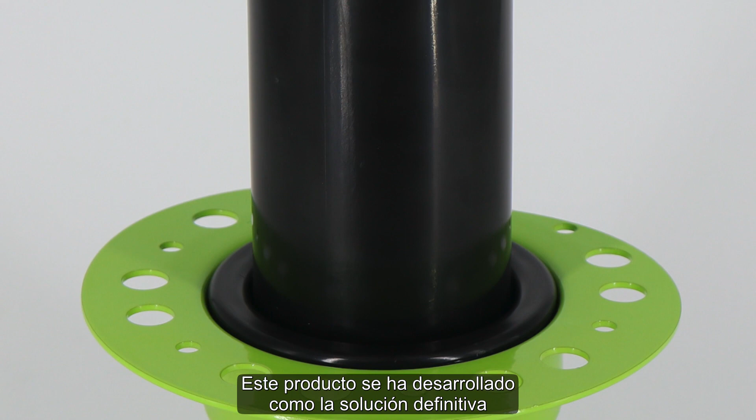This product has been developed as the ultimate solution to quickly and easily install freestanding bathtubs. It comes with an EZ-Click drain for tubs with integral overflow. The asymmetrical metal deck flange provides easier installation in tight spaces, while the removable drain stopper allows for easier cleaning.

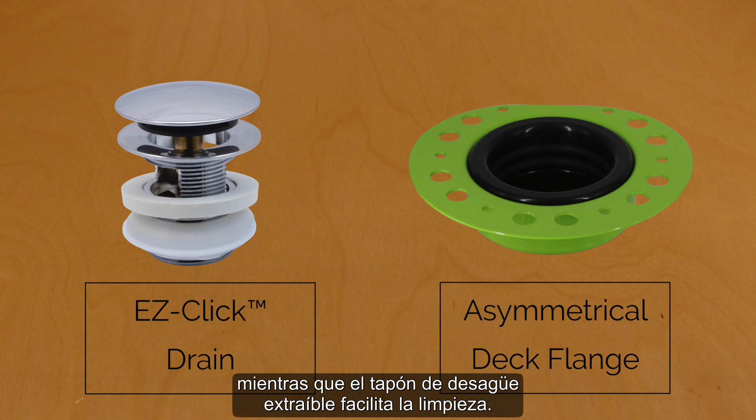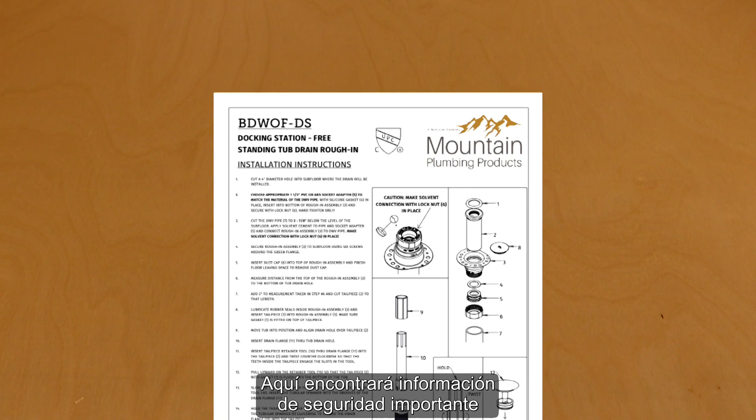Before you begin, please read and familiarize yourself with the installation instructions that came with your product. In here, you will find important safety information and additional guidelines for installing your new tub docking station bathtub drain.

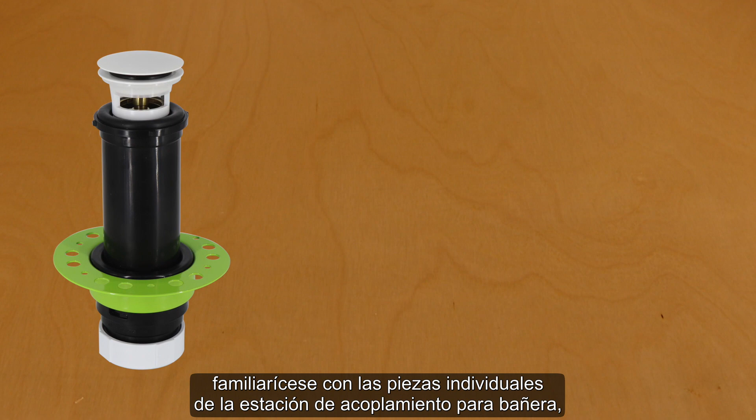Additionally, please also familiarize yourself with the individual pieces of the tub docking station model number BDWOF-DS as follows: tailpiece gasket, tailpiece, rough-in assembly, silicone gasket, socket adapter, lock nut, DWV pipe (not actually included), dust cap, spanner tool, tailpiece retainer tool, drain flange, cap and clicker assembly.

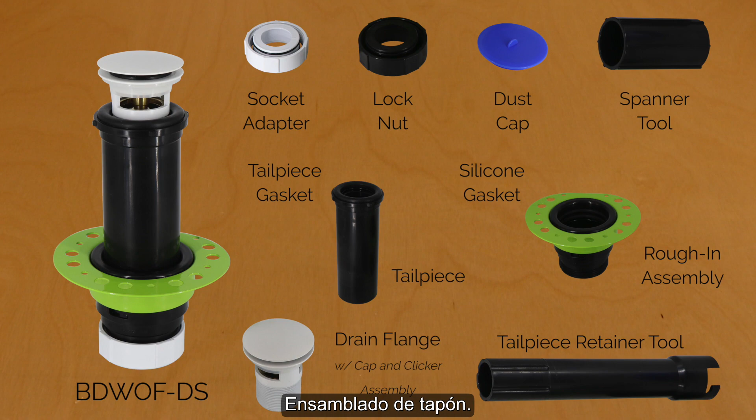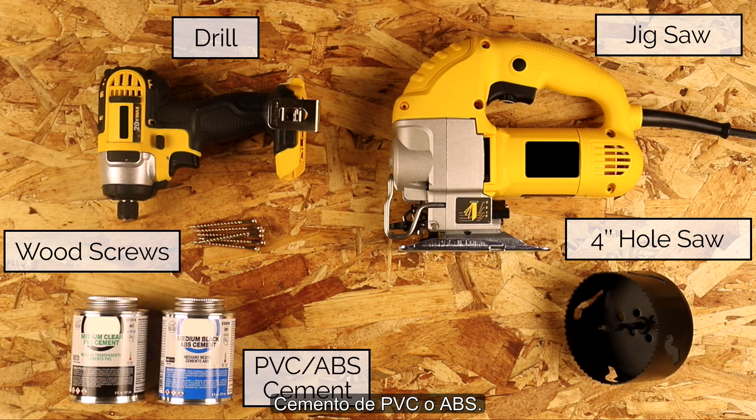For installation in a wood subfloor, the following tools are required: jigsaw or 4-inch hole saw, drill, wood screws, PVC or ABS cement, silicone sealant.

You are now ready to begin the installation of your freestanding bathtub utilizing the Mountain Plumbing Tub Docking Station. Using a jigsaw or hole saw, cut a 4-inch hole in the subfloor where the drain connection for the freestanding tub will be located.

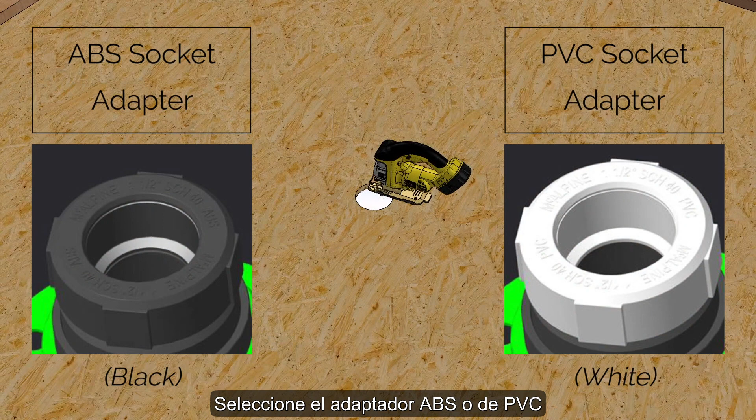Select either the ABS or PVC socket adapter, depending on the material of the drain pipe under the floor. On the underside of the rough-in assembly, insert the silicone gasket, the socket adapter, and the lock nut. Hand tighten only. Cut the drain pipe to be 2 7/8 inches below the top of the subfloor.

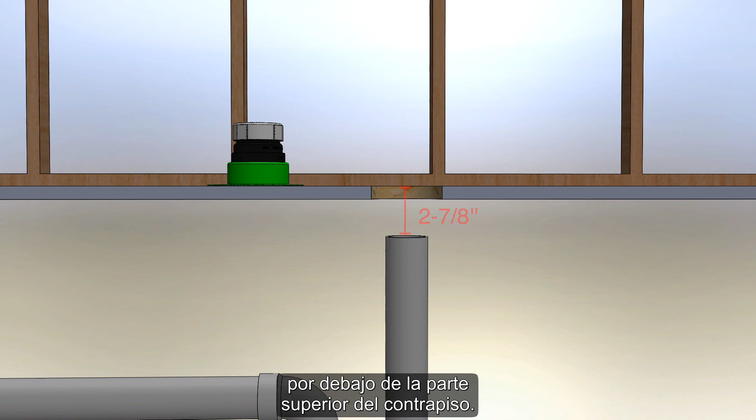Test fit the rough-in assembly to make sure the pipe fits snugly into the socket adapter when the green flange is resting flush on top of the subfloor.

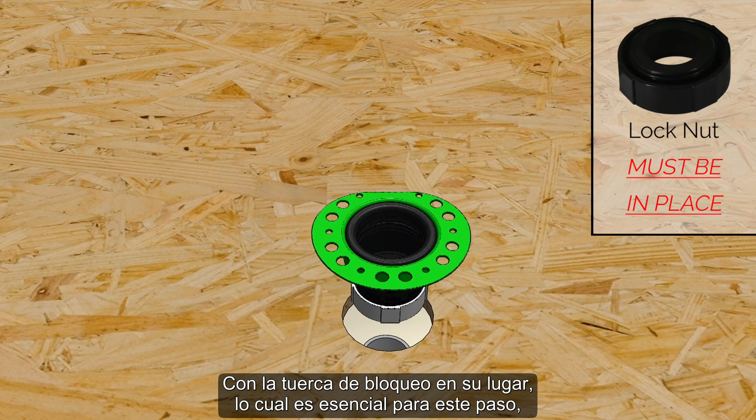Apply the appropriate solvent cement to the outside of the pipe and the inside of the socket adapter. With the lock nut in place, which is essential for this step, connect the rough-in assembly to the drain pipe.

Secure the rough-in assembly to the subfloor using wood screws through the small holes in the green flange. Insert the blue dust cap into the opening of the rough-in assembly. Continue to finish the floor, making sure to leave space to remove the dust cap.

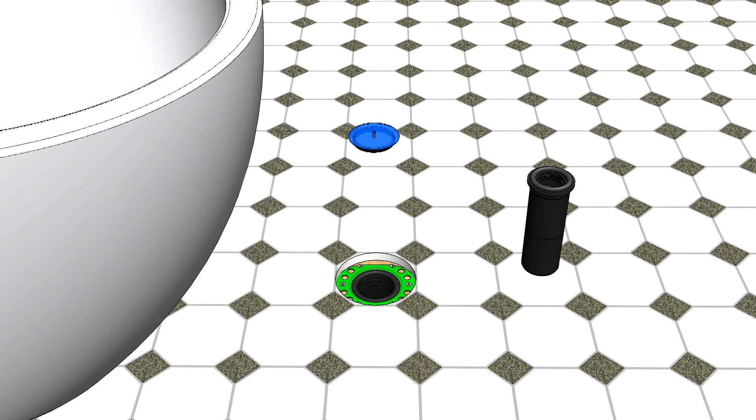Measure the distance from the opening of the rough-in assembly to the bottom of the tub drain hole. Add 2 inches to the measurement just taken and cut the tailpiece to that length.

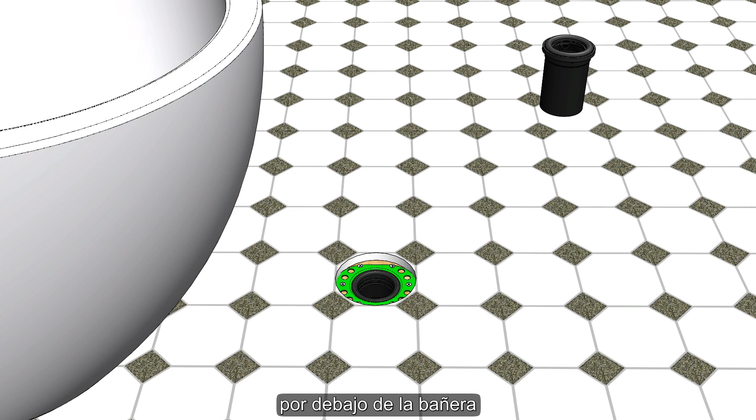The top of the tailpiece should be just about a half inch below the tub when fully inserted into the rough-in assembly. Now insert the tailpiece into the rough-in assembly.

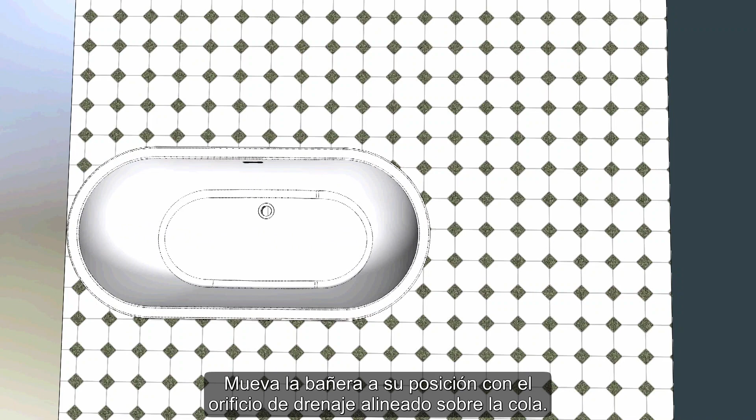If necessary, lubricate the rubber seals inside the rough-in assembly with some water or silicone grease. Make sure the tailpiece gasket is in place on top of the tailpiece. Move the tub into position with the drain hole lined up over the tailpiece.

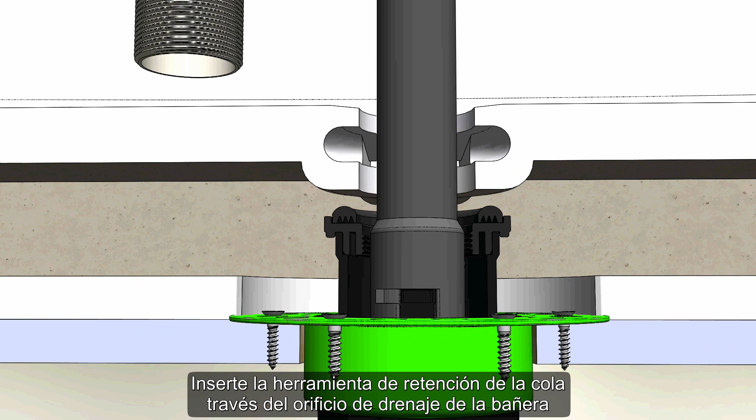Insert the tailpiece retainer tool through the tub drain hole and into the tailpiece. Twist counterclockwise to engage the teeth inside the tailpiece with the slots of the tool. Pull upward on the retainer tool so that the tailpiece gasket is flush with the bottom of the tub.

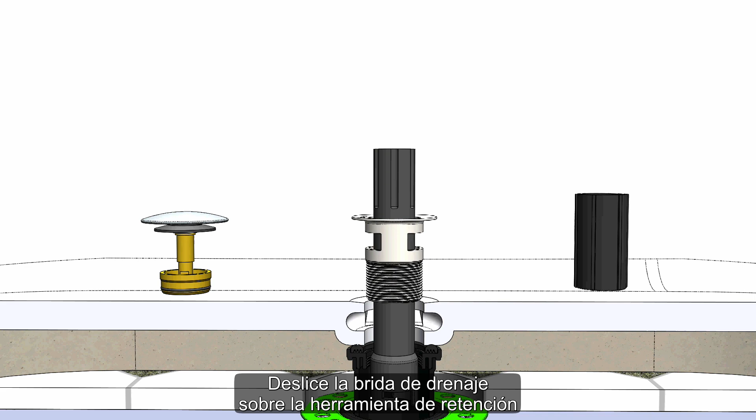Remove the cap and clicker assembly from the brass drain flange. Slide the drain flange over the tailpiece retainer tool until it contacts the threads of the tailpiece.

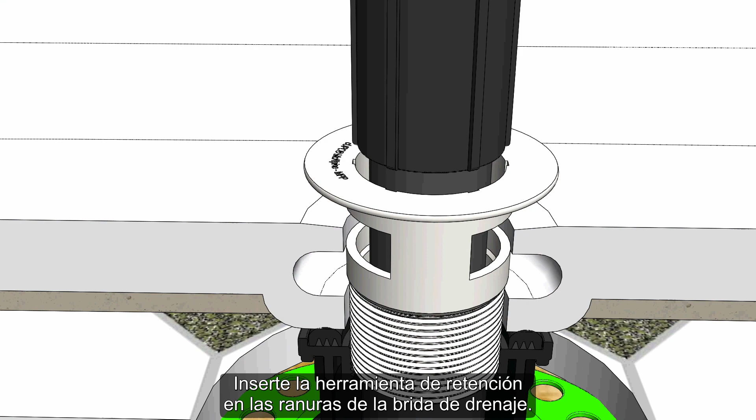Slide the spanner tool over the tailpiece retainer tool. Insert the spanner tool into the grooves of the drain flange. Apply a bead of silicone sealant around the tub drain hole.

Hold the tailpiece retainer tool in place while turning the spanner tool clockwise to thread the drain flange into the tailpiece. Tighten securely. Remove the spanner tool.

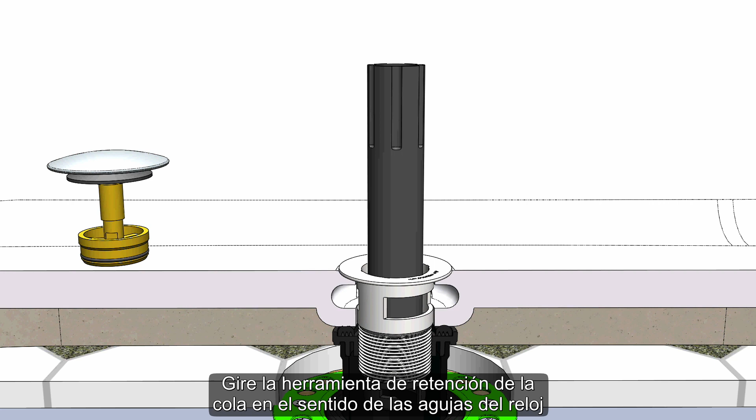Turn the tailpiece retainer tool clockwise to disengage and remove it as well. Drop the clicker and cap assembly into the drain flange and make sure it is fully inserted.

Wipe away excess sealant. Test the function of the clicker drain. Check for leaks around the tub.

You will now have successfully installed a freestanding bathtub quickly and easily by utilizing the Tub Docking Station Bathtub Drain Rough-In.

If you have any further questions, please refer to the installation instructions, contact our customer service department, or visit the resources section of our website.